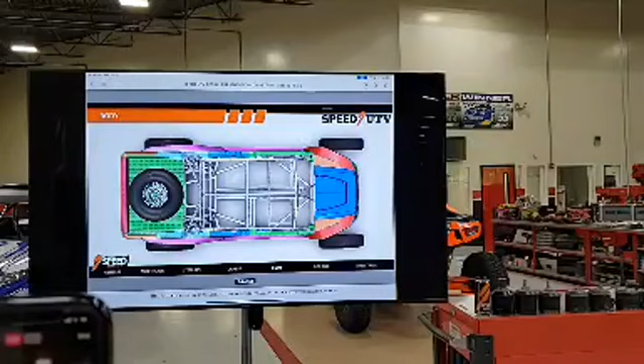Hey, Robby Gordon here. We're 2 minutes from getting ready to start, and we'll do a complete walkthrough of the Speed UTV. We've done them for the last 3 weeks. Obviously we're not going to show everything the same time, so we started to delete stuff out of this presentation. We put new stuff into this presentation that you haven't seen before, and we'll get started here in just a little bit. Give me a second.

As we're waiting, I think that's about 2 minutes, I'll do a quick walk around with my phone and take you guys on a quick shop tour. Sure, bring both. We'll go for a quick shop tour.

Over here in this area is what we have shipping. There's a lot of parts that we've got here and out of California. We build all the suspension components here, water pumps here, misalignment, steering racks. There's a lot of components that get shipped from the North Carolina shop.

Over here I've got a Speed, or actually a double X. Brought something a little different into the camera this time. Kind of show you the standard front suspension. We can do some walk-arounds here. Next week I intend to get a couple other brands, potentially a Can-Am and a Polaris, into the shop, and we'll do some walk-arounds with those cars as well.

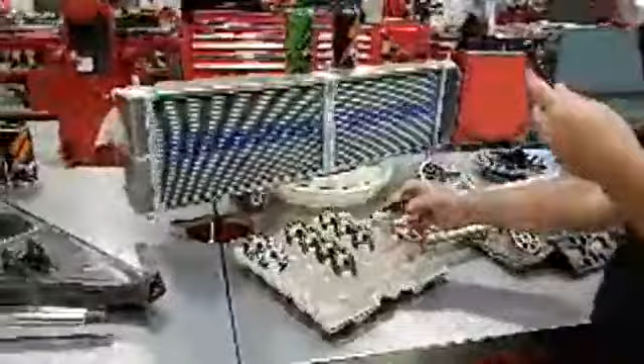Remember, we're still producing parts for the Textron Double X as well. We have the Ron Davis radiator - this is a prototype radiator that will go into a car that we're currently building. We have our clutch locks. A lot of people don't know about our clutch lock system, but this holds the bolt from coming off on the clutch lock with vibration. Those seem to happen a lot.

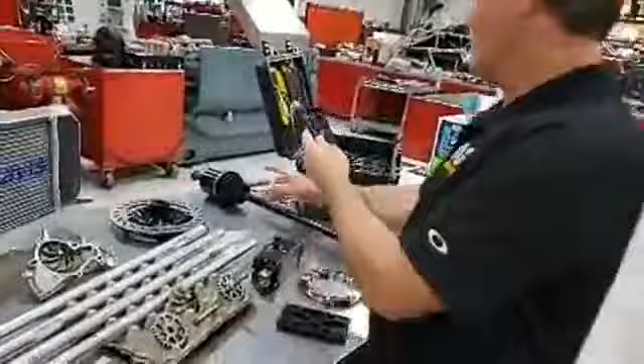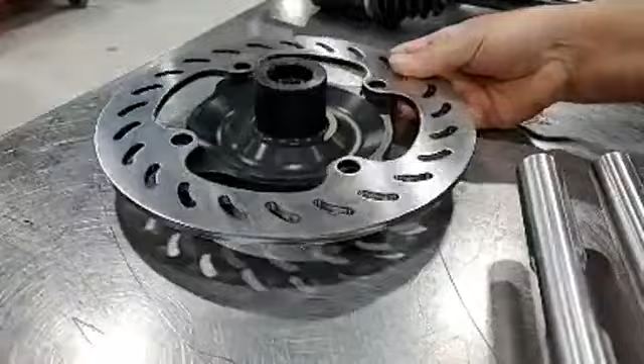Water pumps - we've got our billet water pumps. Steering support gusset kits. Race hubs that are shouldered into the splines here, so all the brake rotor load is not just on the bolts or on the studs, it's registered into the diff or into the hub.

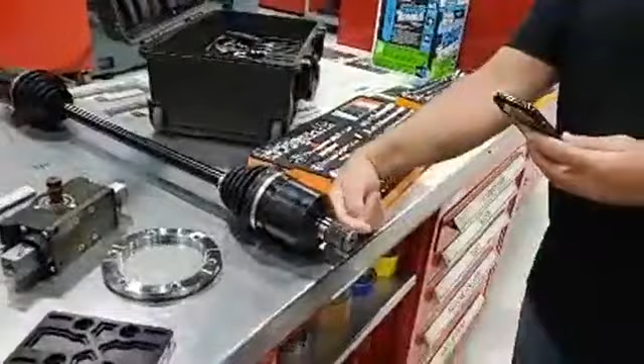This is our positive locking CV. This will be front and rear, and if you look at how big that stub is, it's massive compared to my finger. You know, if you look over here, it's massive compared to what we're going to do on the Speed UTV front as well. So what we've learned in the rear, we've adapted right over to the front diff as well.

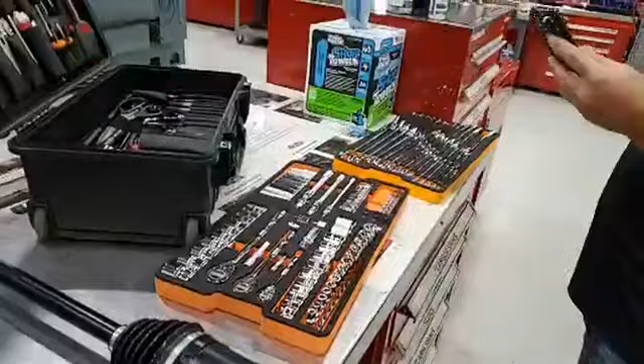This is a Speed toolbox. We've been working on this for quite a while. This will be something that by the time we have the cars out, it will be up and ready as well. And then obviously walking through our setup area and machine shop. So that's a quick little walk around.

Fast facts, we've talked about this every week, I'll be quick on it. 230 horsepower, 120-inch wheelbase for the 4-seater, 15 inches of ground clearance, 32-inch tall tires stock, and they will clear a 35-inch tall tire.

Questions of the week. Sean from Lorenz Industries has beaten me up quite a bit, we've had some good bantering back and forth. I told him at one point I will send you some popcorn, and after thinking about it, I'm going to send him a box of Jack in the Box, or what is it, Cracker Jacks. He's getting Cracker Jacks. Sorry, Jack in the Box is my morning breakfast, they've been closed lately in the morning.

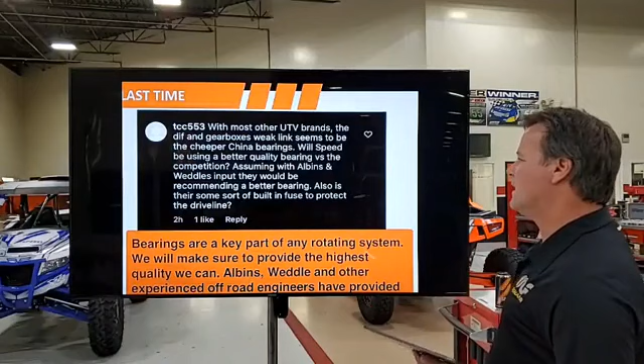Great question, I think I answered it in the last one too, but we will be using quality parts and quality bearings. We've leaned on Albins, Weddle, and other highly qualified engineering guys out of California who built parts for the Hummers back when we ran the Dakar. Without their support and willingness to jump in and help us on this project, it would have been a much more difficult task, but we've been able to build and move forward.

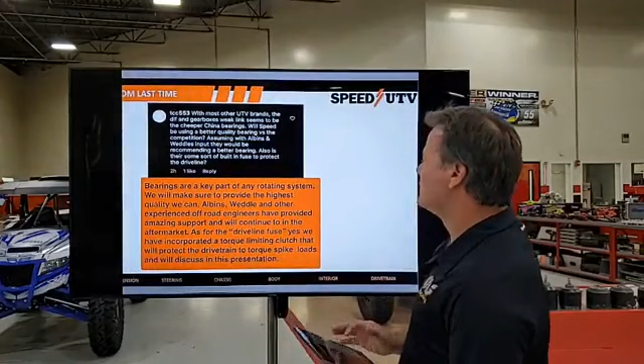So bearings are a key part of the rotating system, and we'll provide the highest quality parts we can. The built-in fuse, we're going to talk about today in our front and rear diff presentation, so I'll get to that a little bit later.

Maybe it was covered already, but what tire will we be using? Sorry, my question wasn't transmission related. Actually, I'll get into tires a little bit for you. I don't know the brand we're going to use as the manufacturer, but I do know what our tire is going to look like, so I can show you that. We're about 75% going to build our own tire for the UTV as well. So our own shocks, our own tires, our own wheels, gearbox, motor—pretty much a purpose-built UTV for the industry.

All right, let's move into the conversation for today. I said I would talk about something new. It's taken me 10 minutes to get there, so sorry about that. I'll try to get faster with each one of these. Maybe you'd like a lot of questions answered, but we cut it down to 3 today.

High pressure cast aluminum: park, neutral, reverse, neutral, low, high, cruise. I believe this is the first 3-speed CVT in the industry. Maybe I'm wrong, but a 3-speed CVT. And the reason for cruise is, think about getting on those long gravel roads down in Mexico, going 30 miles wide open—why would you want to sit there at max revs when you can click up another gear and rock on, have some fun? So 3-speed, 3 forward drive gears with a CVT.

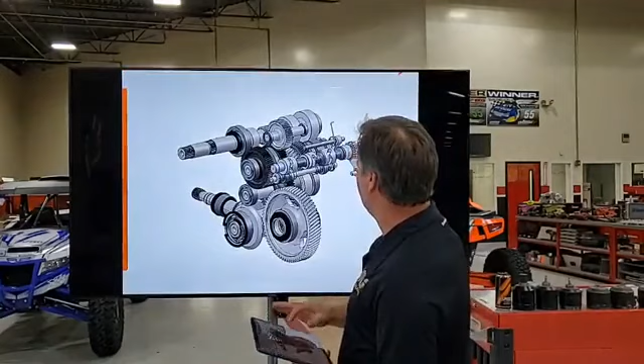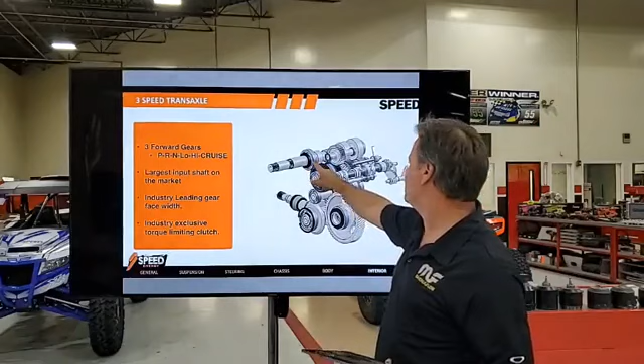Back inside, I'm going to get into the gearbox now a little bit and start showing you what the inside looks like. This gearbox has the largest input shaft in the industry, which means we get to put in the biggest bearing. This is where all the load comes in off the CVT—big bearings on the inside and outside, and the largest input shaft in the industry.

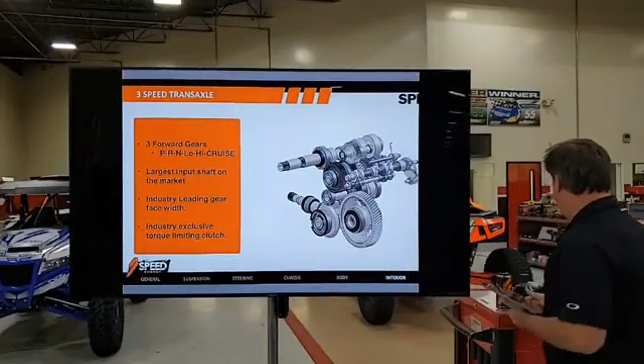Industry leading gears—so I brought this Mac toolbox over here, and I'll move it over to you. This is the drive gear off the XX, driver's side would be my right. As you can see here, it's beat up a little bit. So this is not near wide enough for what we're gonna do with 300 horsepower. We've doubled the width of this gear plus some—so this gear here is now this gear here, and as you can imagine, 2.5 times larger than a standard XX.

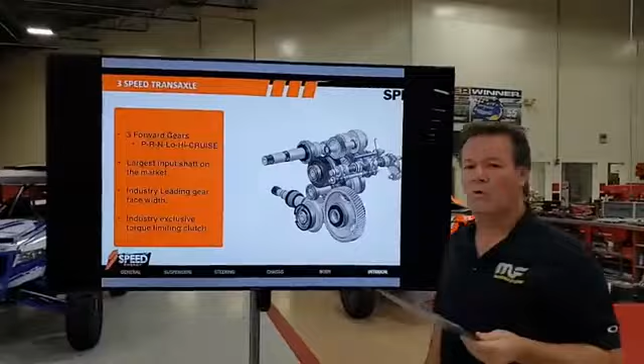Probably the coolest part in the whole gearbox, something we've been working on for a while: industry exclusive torque limiting clutch. We have dropped a torque limiter in here.

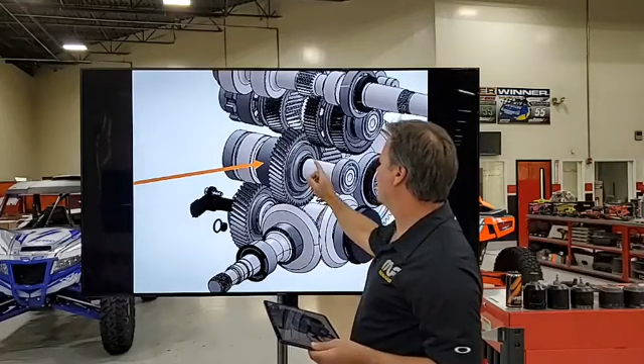It's built into this gear that's a drop gear that takes us down to the spool, and it's the gear that's obviously the loaded gear. So it would have torque limiters in first, second, third, reverse, any gear you want. It's built in here, a series of clutches with a pressure plate built into it, and we will optimize during testing what torque we want to see.

Someone asked, will we be able to get in there and adjust it? The answer is, if you're an experienced gearbox guy, you could probably go to Weddle Industries or one of these high quality gearbox companies we have a relationship with, and we'll get you in there so you can adjust that clutch if you choose to.

So, industry exclusive torque limiting clutch will be built into the rear transaxle of the Speed UTV gearbox. This will be on the 2-seater, the 4-seater, and the UTT.

This is something new, and it's something I feel we definitely need, because one of the things we struggle with in these UTVs is being in the big whoops like down in San Felipe, trying to run across the bumps and bang - you either spit the drive shafts out of the thing or you kill a belt. We need something to give us a little bit of torque limiting, and everybody wonders, why does a trophy truck run a torque limiter? Why do you guys run a gearbox? Why do you run a clutch?

We need that torque limiter as a sponge. That's what this is gonna do. This will allow it to slip and continue and hopefully save the gears. What we've gotta be careful of is when we're setting it up, that we don't put too much slip in it and you burn up.

So we will work on that. That'll be one of our test team products that we'll be working on throughout the summer, and we will get it dialed in before we deliver cars to you guys.

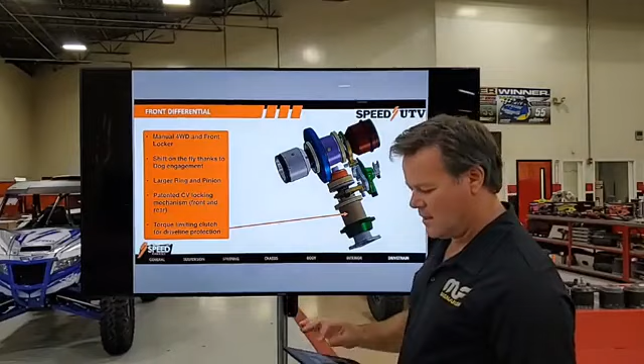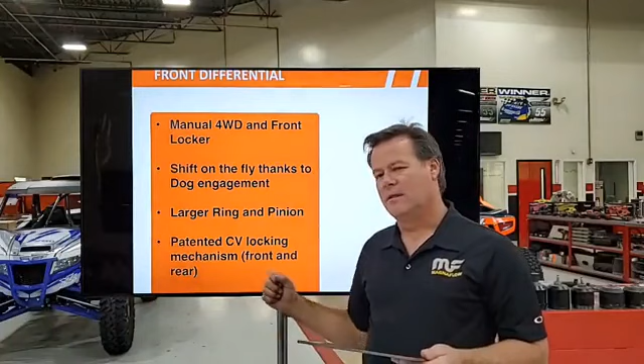Front differential - I'll go to the questions first. Manual, 4-wheel drive, and front locker. Basically, the second lever, the lower lever closer to the driver, that's going to be your 2-wheel drive, 4-wheel drive, and then pull it back one more lever and that'll lock you into a full locking diff.

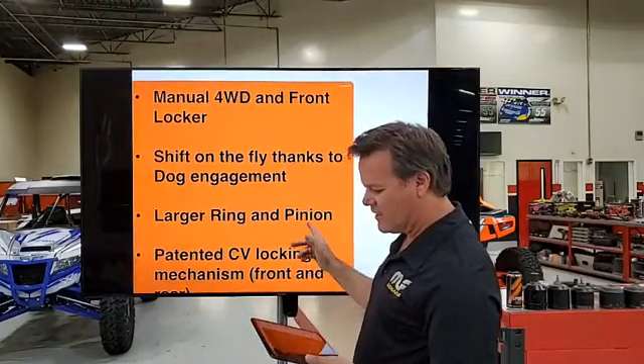Shift on the fly, thanks to the dogs. That's what we use for shifting. Even NASCAR gearboxes have dogs in them, and that allows us to shift.

Largest ring and pinion in the UTV industry, the biggest diameter ring and pinion. That'll make it stronger. Obviously, if I'm going to build a car that has more power, bigger tires, faster speeds, we're going to have to give you stronger components, and that's what we've done.

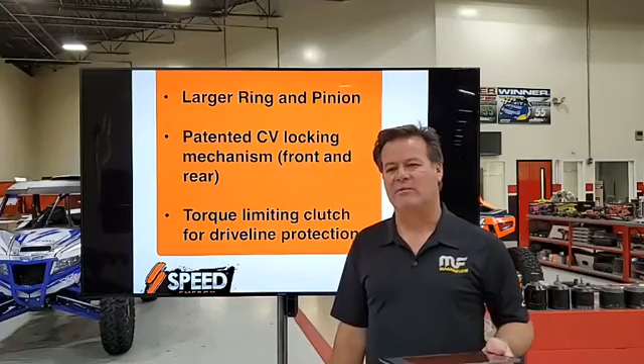And then we have our patented CV locking mechanism for the front and rear. I think I'll walk you guys through that today - you might not be familiar with it. It's something we built in our aftermarket components for the double X. This is our dual plunging axle. I'll pull one of those out and show you how that works.

Here's inside the front diff. As you see, it has the standard and the locking CV. The locking mechanism works right there. And as we go through here, it's dogged as well for engaged, disengaged, and it also has another slider for spool and non-spool.

So for guys that like to go to King of the Hammers and go rock crawling, yes, we will be able to lock these together, front and rear, and you'll have a four-wheel drive, fully locked setup. Obviously, it's going to push like a dump truck until you unlock it. So this is only for low speed, climbing, rock crawling, mudding, stuff like that, is when you want to lock your front diff. Again, something new for the industry.

That torque limiter we put in the rear diff heading down to the spool - well, if we're going to build one, we might as well build one that can pop into the front diff as well. So now we've got separated front and rear differentials, which means if you increase speed on the front and decrease speed on the rear, we've got a slipper clutch here as well. So it has torque limiters in the front drivetrain as well, which is going to allow this to take big spikes and slip that clutch.

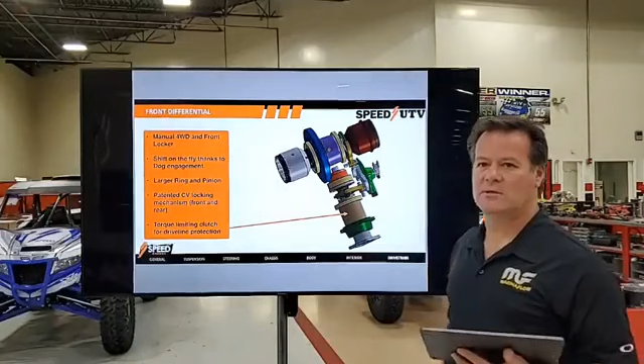Hopefully, is there any questions about the four-wheel locking mechanisms? Anybody ask me anything as we're going? Maybe I'll just explain some of this testing on these CVs, this goes back to the question of the week, how do you know what to build and why would you build stuff like that?

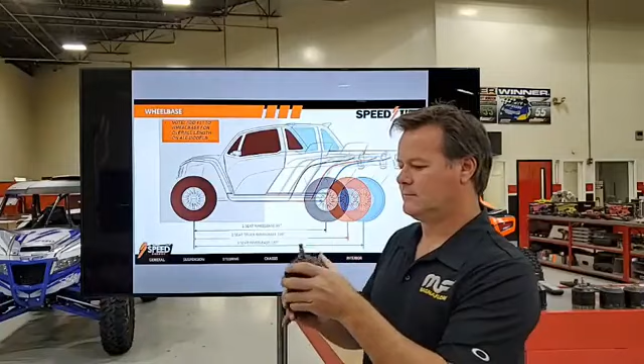This comes from 5 years of testing with CVs, material specs, how they break, how you put your radiuses in, what sharpness, what material. This all comes from experience and testing.

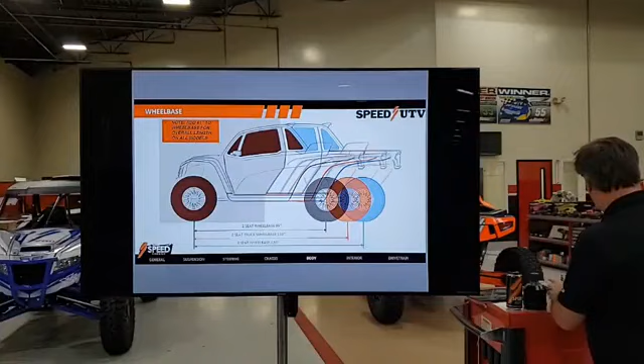This is the outer CV from Bailey Cole's front diff at King of the Hammers. It snapped right off. This is where the torque limiter is going to come into play, and this would be connected on this guy here. Obviously the CV here just slipped it off.

One of the biggest problems was the radius. There's a radius here, and how you go from a flat to a 90, how you radius that component. Those are some of the things we've really put a lot of effort into.

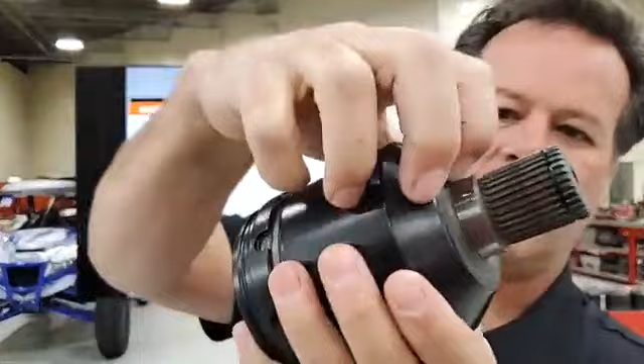This is our Speed dual plunging CV that we sell on Speed side by side currently. If you look in here, you can see there's no sharp radiuses. We do an undercut, a nice radius, we roll onto a ground machine surface, transition into splines. Then we've got our locking mechanism here, and then we've got our threaded CV cap, which is this component here, which holds the ball in here.

When we're getting all this travel in the rear, we're actually not plunging on the splines, we're plunging on this ball track. How this ball track slides inside here is how the Speed UTV can get 25 inches of wheel travel with no track change. That's a big difference from a Can-Am, a Polaris, a Kawasaki, a Honda, and a Yamaha. We have the most consistent track suspension in the industry with the trailing arms and the offset unequal length A-arms and the way they change camber and change track. We try to keep our tires in the same position at all times.

Got a good question here. All right, let's go for it, Casey. Does the front drive release when you're off the gas? We have that in the short course, just curious how will it do? Okay, hi Kyle, excellent question.

You asked if the front drive releases while off the gas, and I think I understand what you guys use there, probably got pretty much a sprag bearing, like on an RC car, something that unlocks. Unfortunately, we don't have that. The reason we don't have that - it's a great component. Got something similar to it in the Unicorn. It's something we would use for off-road racing like what you do.

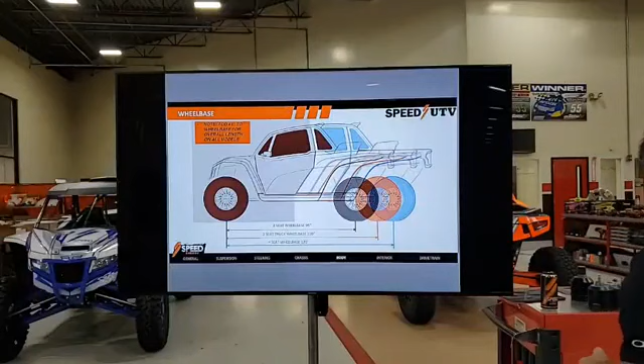All right, I'm going to move into the rest of the presentation. Thank you for your questions today. Really stoked that Kyle LeDuc joined in. Look at him, obviously a champion, lots of experience, and I'm a fan. Keep up the good work.

Right here is the wheelbase we talked about last week. Real simple, just want to note it one more time. If you add 41 inches to the center wheelbase of the front tires, that will give you your overall length. 2-seat wheelbase is 99 inches. 2-seat wheelbase on the truck, the ideal perfect race car, is 110 inches. 4-seat wheelbase is 120 inches. I believe that is the shortest high performance sport UTV in the industry.

Why do we want it to be shorter? Now you can take a 4-seater on the trails, get around the trees easier, and be less apt to get high-centered on the sand dunes. Again, another perfect desert wheelbase, 120 inch wheelbase.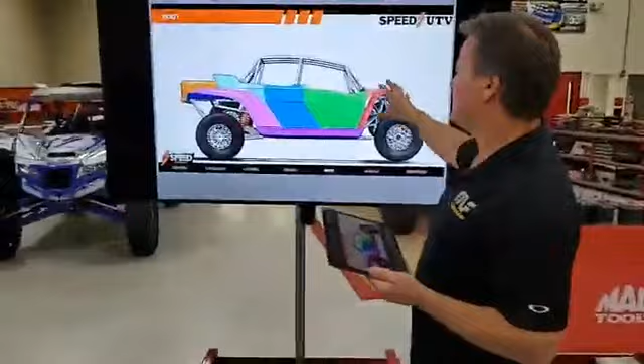Any questions there? You see any questions, Daniel? Just about the camera angles. Just about camera angle, fixed angle. All right, we'll get into body. As you can see... no, I'm just saying the camera angle is fine here.

Front wheel travel: 25 inches of wheel travel, front and rear. 25 inches of wheel travel.

Body is coming along, I'm showing you body stuff every week. We had a long body review last night. I'm excited where we're at from, call it center of the tire, backwards. We've got a little bit of work to do here in the bed. I'll show you what we did from last night to today.

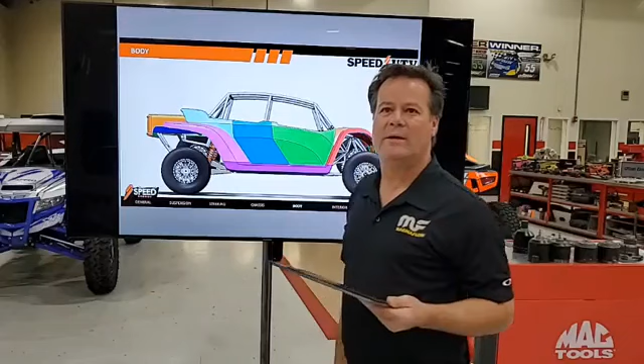Jeff is his name, right? Yep, Jeff and his group is doing a wonderful job out in Northern California. Thank you guys, we do appreciate your hard work.

So I had a question: what's the leg room in the rear seat? Do you guys want to do that now? Okay, let's do that question real quick, we'll take some cameras and go for a walk. You got it, take the whole thing? Perfect, all right, we're gonna go for a walk.

Kyle, how tall are you? 6'4". We're gonna put a 6'4" guy in the back of the UTV. He's all legs. 6'4", how long are your legs? Stupid long. How long? Get a tape measure. Max, can you grab a tape measure? All right, Max is gonna get his tape measure. Here's Kyle, 6'4", sitting in the back.

The way he can put his legs around the front seat, he has plenty of room. I believe he's kinda hard to see comfortably back there. Can you see? Yep, no problem. I will climb into the front seat. Obviously, he can start looking at my bald spot because I know I'm going bald designing this car.

There we go, there's two of us sitting inside the vehicle. Max, you want to go for a ride? Oh yeah, come on, get in. Let's go for a ride.

Max has been designing parts. Both Daniel and Kyle have been teaching Max. What component on the car did you get? The shock perch, the spring perch. You designed it and built it. Did you run FEA on it? Yes. You ran the FEA, it's going to pass. And you drew that during class? Yeah, we're taking him to school here at Speed UTV, and Max designed the spring perch on the bottom of the shock. Unfortunately, we could drive this car, but Casey took the keys from us today.

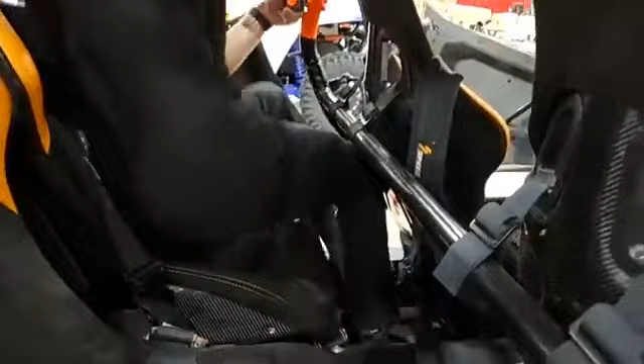So AJ Whitehead asks, how fast can I hit the bunny jumps in the 4-seat? All right, I'm going to get AJ. AJ, where you at, brother? AJ asked how fast can you hit the bunny jump at Parker in the 4-seater. Man, all I can say is I'm glad I got to watch you go before me during qualifying, because I probably went off the same line you did. You unfortunately landed in a 3 to 4 foot dig out whoop, and it was gnarly. I'm glad you're okay. We've been friends a long time, but let's keep this about 50 miles an hour, not 150 like you tried to do.

Kyle, what's your inseam? Kyle's inseam? 45. No, that's what he said. You inseam, don't know what pants you bought? 36-inch long inseam, sat in the back of the 4-seat.

We'll go back to work here. This is why it's really nice to have an arsenal of cars, components, parts that we did 10 years ago, 20 years ago - things we've done from the...

They want Kyle on the front. We'll talk about the front seat because we've had Kyle on the front seat, and we've addressed the dash and how it comes in and meets your shin. We put that on the same angle as your shin, so as you're sitting in there, your shin leans right against the dash with a nice pad there. We've increased the butt-to-knee length 4 inches over the XX, so we have 4 inches more room for longer knees in the front of the 2-seat XX. Now the 4-seater, if you're a basketball player or somebody bigger, obviously we will build cars to work for you. We will change your shoulder bar and address it so everybody can drive our cars. Our goal is to have a car that's, one, safe - that'll be next weekend's conversation, next Wednesday's conversation will be structure of competitive vehicles and why we designed the Speed UTV the way we did.

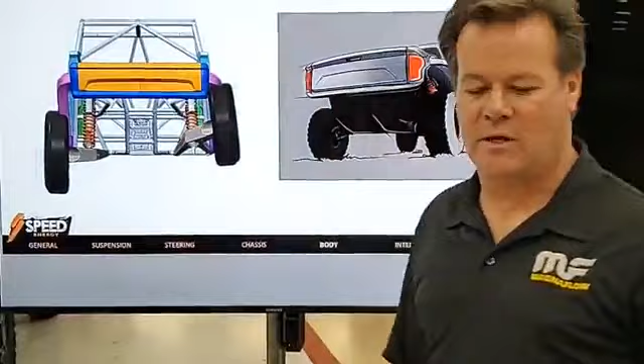Here's another view of where we've been bodywork-wise. Suspension bottomed out on a 35-inch tall tire, ride height on 35s. Last week I told you we're looking at the rear bed and trying to get some design. Obviously you can see we're starting to get closer with the body here. We'll get into tail lights next week, but working on this. Really like the way that car looks.

The bed is 35 inches front to back. Now, a lot of confusion, UTT versus UTV. Every vehicle we are building, coming out the door today, has beds 48 inches wide, 35 inches long, except for the UTT, which gains another 15 inches—so it'll be 48 by 50. Every car is a truck, every one. So we do not have a sport bed, every one of them has a truck bed. We've been getting a lot of calls like, hey, John bought a UTT 4-seater—no, John bought our standard limited edition 4-seater that comes with a truck bed. So all cars come with the bed.

Reason for coming with the bed, like I said last week—sorry, these are the photos I could find. This guy wanted to put a 30-inch tall tire in his Polaris, can't even stick it in there. The Can-Am does not fit. I've seen tons of Can-Ams that have the spare tire literally mounted up on the roof. That is the last thing you want to do with your car, guys. You're going to put yourself in a position to roll that thing over. Keep your center of gravity as low as you can. When you're adding accessories, keep them low.

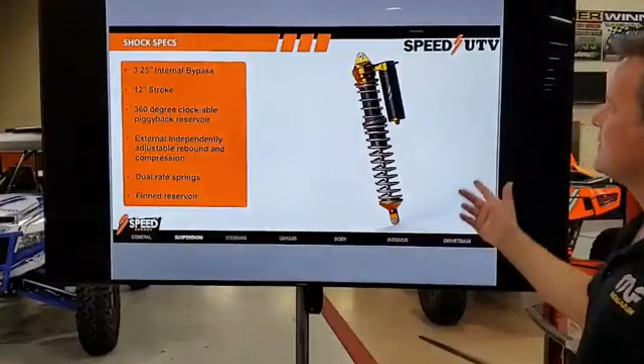Shocks, we talked about 3.25 internal bypass, 12-inch stroke, 360-degree spinning reservoir, adjustable rebound and compression in the reservoir, dual rate springs, finned reservoir for cooling, aluminum shock body, aluminum reservoir.

Hydro electric power steering, steering rack, hydraulic ram, 1.7 to 5 ratio, less than a half a degree of bump steer for 25 inches of wheel travel.

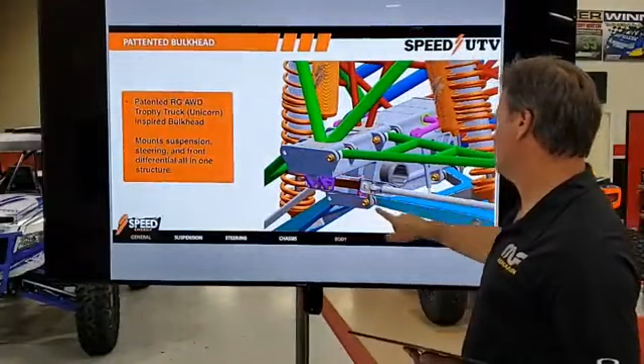Front bulkhead. Structurally, this is the right way to build a 4-wheel drive off-road car. We built this on other vehicles. We tested it. It's on the Unicorn, and it has transferred over to the Speed UTV.

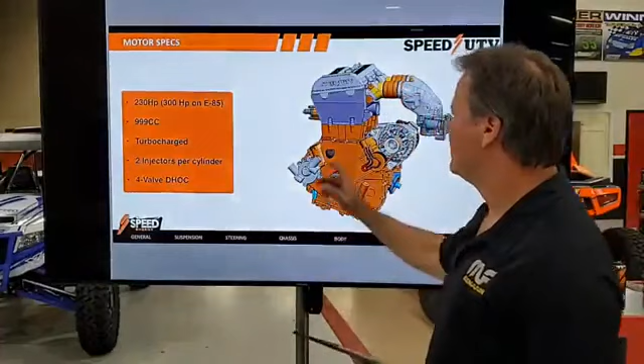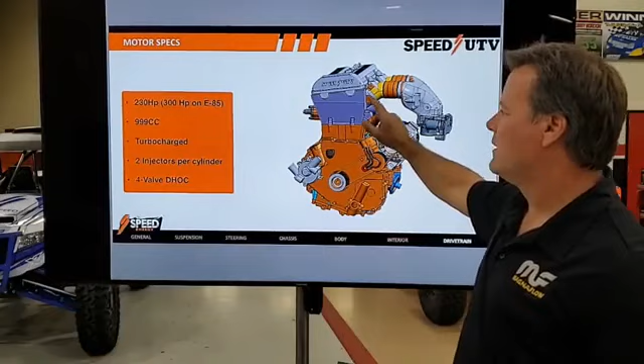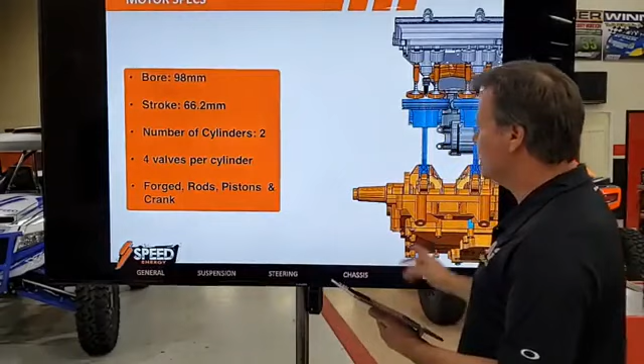Engine, 230 horsepower on 91 octane, 300 horsepower on E85, 999cc, turbocharged, 2 cylinders, 2 injectors per cylinder, 4-valve, dual overhead cam. Bore is 98 millimeters, stroke is 66.2, 2 cylinders, 4 valves, forged crank, rods, pistons.

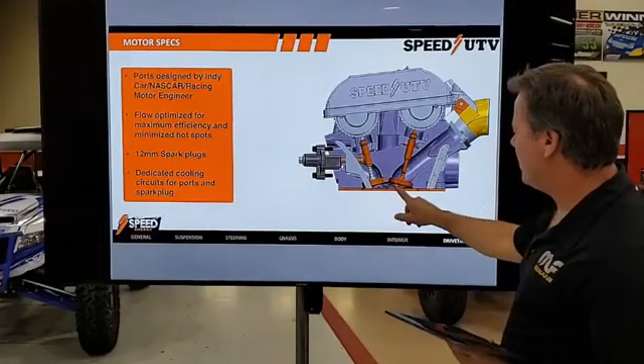We have optimized the head flow. This is very different than anything in the industry. We have adjusted properly exhaust intake, and it has a dedicated cooling system for spark plugs. Ports are designed by friends, and it's good to have friends in the industry that are experienced. We're leaning on 120 years of experience combined between the 3 guys working on the cylinder heads. This guy has 40 years, this guy has 40 years, this guy has 30 or 40 years. The experience you learn from all forms of motorsport over the years is how we're able to produce a car like we're doing.

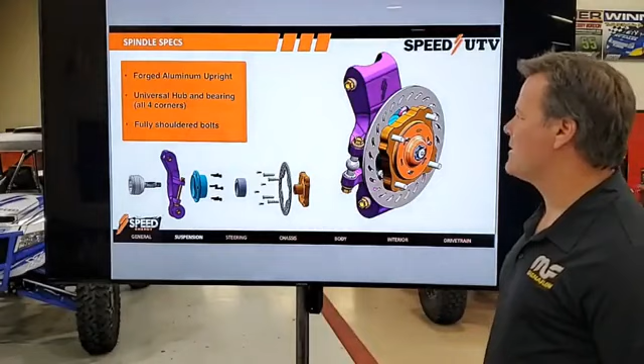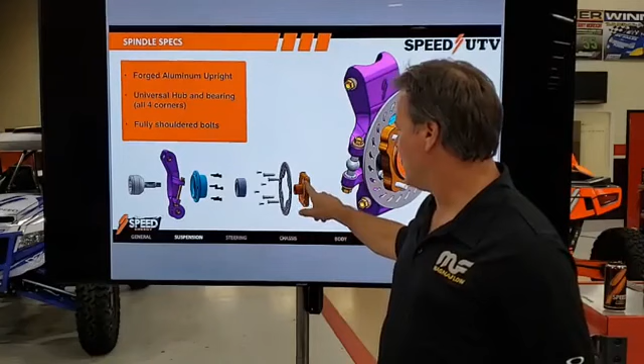Talked about spindles, why we designed the spindles, what experience we have with them. This is the spindle that we ran on the Speed UTV at Dakar 2 years ago. So what I'm giving you as a production component is a very, very high-end, high-performance component. Shoulder bolts, large bearings, spindle hub has a snout on it, registered for the brake rotor, has bolts and studs, large bearing - I believe it's the largest bearing in the industry as a wheel bearing.

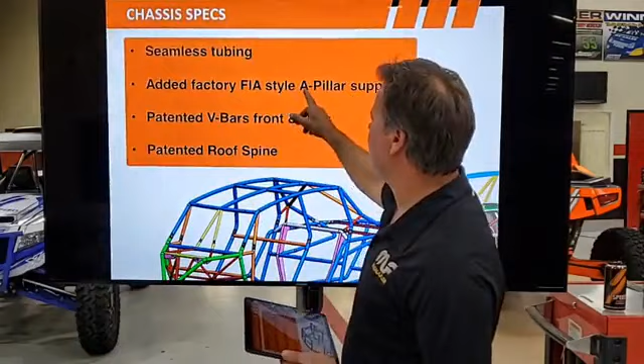Seamless other chassis specs, seamless tubing, added FIA A-pillar support. We'll talk about comparing our cars to other vehicles next week. This is going to be an interesting conversation. We will show you why we design things the way we do, and why, if I was in the industry to buy a UTV, why I would seriously consider converting the car you have today into a Speed UTV.

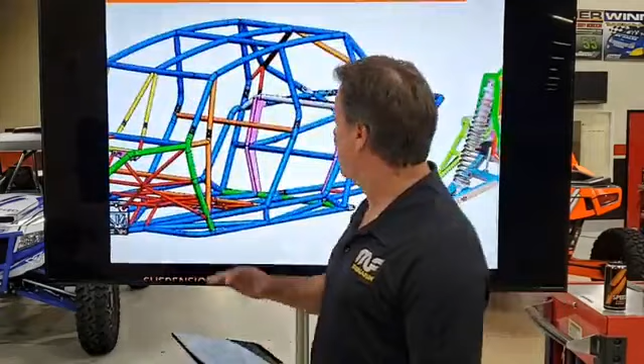A-post. A's. Completely built like a bridge and a structure. Properly structured race car, seamless tubing. Patented V-bars front and rear that work as a spine.

Patented roof spine. Next week we're going to talk about Can-Ams, Polarises, Yamahas, Kawasakis, and everything you really want to ask questions about, because I will tell you the reasons why I wouldn't do that when I design a car. So tune in for next week.